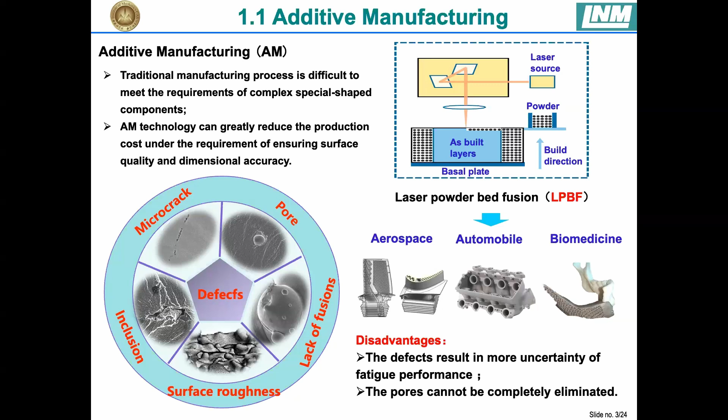But at the same time, defects will result in more uncertainty in fatigue performance. Through optimization of the process, manufacturing, and post-treatments, defects like micro cracks, inclusions, surface roughness, and lack of fusion can be well eliminated, but pores cannot be entirely eliminated due to the rapid cooling speed, which causes gas to be unable to escape from the as-built component in time. Therefore, it is critical to further study the influence of pores on fatigue performance.

For fatigue performance, fatigue life is one of the most strict indices to evaluate. But traditional fatigue life prediction models, like stress-strain, fracture mechanics, energy, and damage accumulation-based methods, all need a large number of experiments to fit material parameters to get accurate results. Also, they are usually only suitable for predicting low cycle and high cycle fatigue life.

In very high cycle fatigue, corresponding to failure cycles exceeding 10 million, we expect a larger error due to the different dominant factors in crack initiation and crack growth stages. Therefore, in this study, a pore-based prediction model of crack initiation life in very high cycle fatigue is proposed.

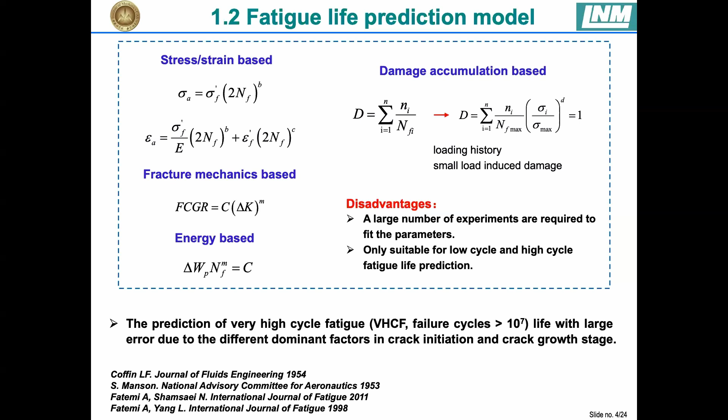The second part is about the crack initiation life prediction model and the corresponding results. The investigated material in this study is AlSi10Mg, and the corresponding chemical composition and manufacturing parameters are listed here. First, micro CT technology is applied to conduct defect characterization.

The porosity is measured at 0.33 percent, and the distribution of pore equivalent diameter and sphericity follow the log-normal and Gaussian normal distributions respectively.

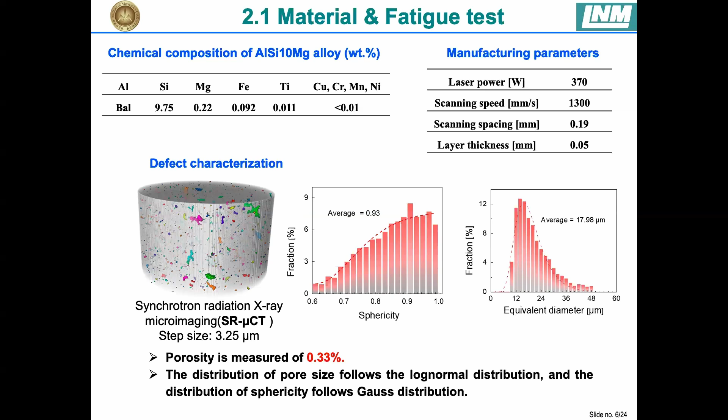EBSD is then applied to conduct microstructure characterization. The microstructure shows a weak texture, and the distribution of grain size follows a log-normal distribution, with most grains less than 2.44 micrometers.

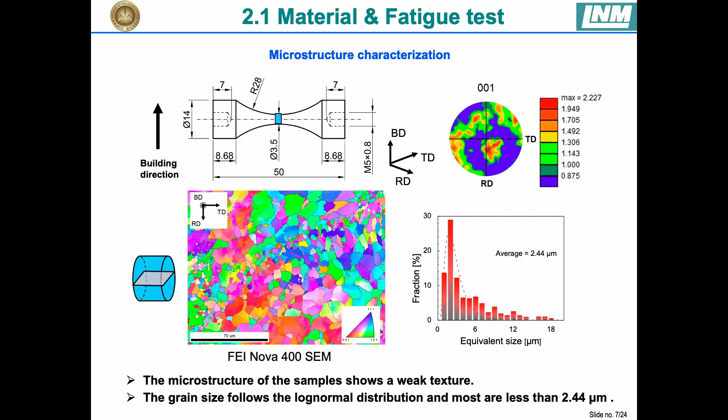Specimens are then tested with the ultrasonic fatigue test at a frequency of 20,000 Hertz. The results of the stress-life curves at different stress ratios are plotted here.

It can be found that the position of failure transferred from the surface to the interior near the fatigue endurance limit, corresponding to a failure cycle of 10 million cycles.

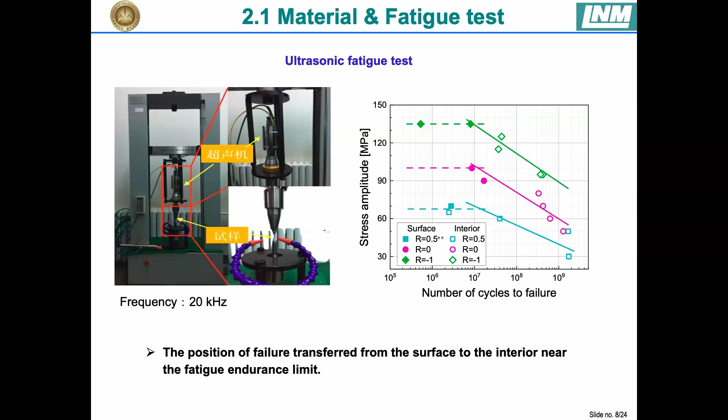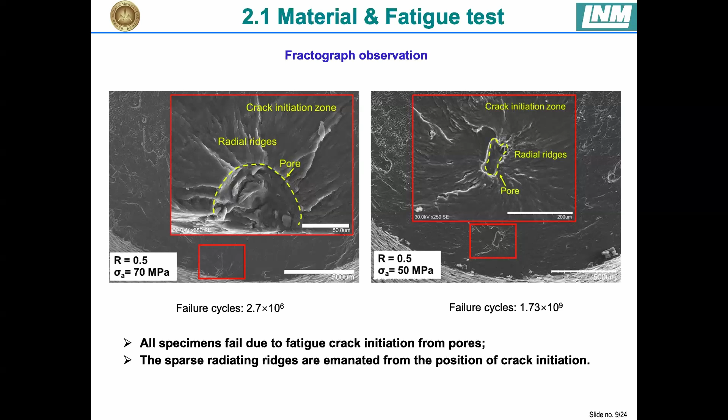Fractography observations show that all specimens fail due to fatigue crack initiation from pores, and it can also be found that sparse radiating ridges exist near the crack initiation position.

Therefore, in very high cycle fatigue, the majority of fatigue life is consumed in the crack initiation life, and within crack initiation life, it is mainly consumed in the initial crack initiation and early crack growth stages.

The following is the flowchart of the crack initiation life prediction model in this study. Step one is generation of pores and grains in a cell according to the previous microstructure and defect characterization.

Step two is calculating the initial crack initiation life of all pores, and then the minimum initial crack initiation life serves as the critical defect, with the corresponding grain size serving as the input to step three to predict the early crack growth life and the crack initiation life.

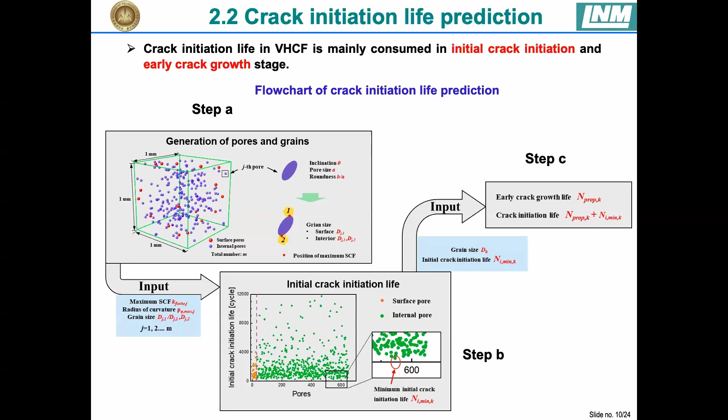For the initial crack initiation life model, we adopt Chan's model, modifying the Tanaka and Mura dislocation model by introducing the Taylor factor to transfer the micro model to the macro model.

Due to stress concentration near the pore, the local stress is higher than the applied stress. Therefore, in this study, the average local stress is adopted. In many studies, the pore is always equivalent to a circle, without considering its morphology and position. In this study, these two cases are taken into account.

Therefore, the stress concentration factors and the corresponding radius of curvature need to be modified.

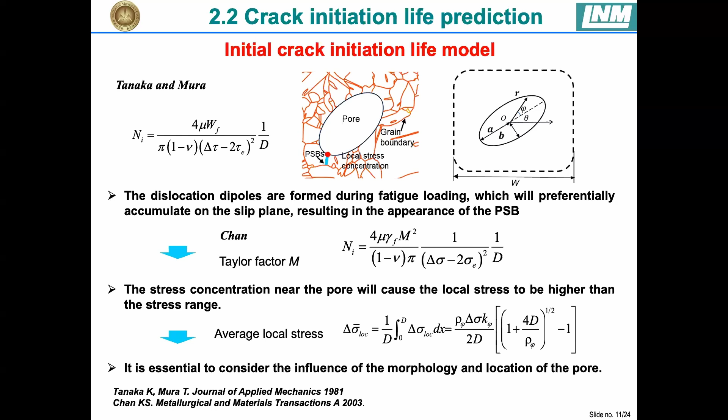For the maximum stress concentration, the finite element method is applied in this model. The inclination means the angle between the major axes of the pore and the loading direction. It can be seen from the simulated results that the maximum stress concentration shows an increase with the inclination, and only the position of the maximum stress concentration factor of a pore needs to be taken into account.

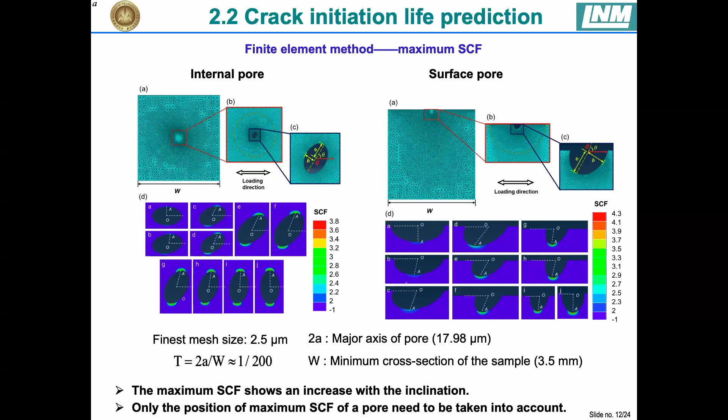The relationship between pore inclination, position, roundness, and the maximum stress concentration can be obtained by fitting the results. The obtained equations are listed here for eta equal to 1 and 1.25, corresponding to the internal and surface pores respectively, and with key initial values of 2.81 and 3.03 corresponding to the internal and surface circular pores.

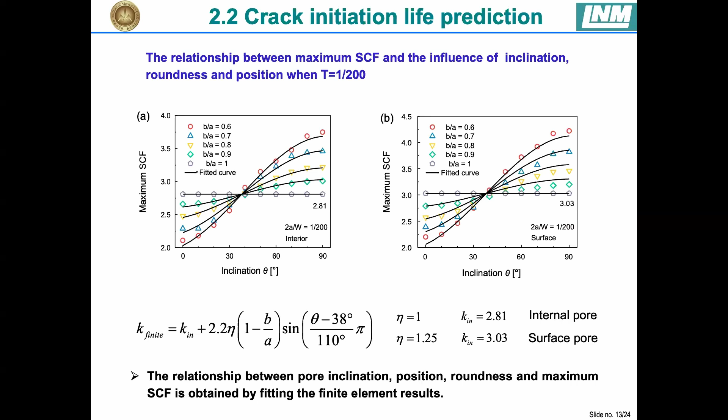For the position of the maximum stress concentration factor, Patel proposed a model of the circumferential stress along the pore edge in polar coordinates. But in this model, the inclination is not considered.

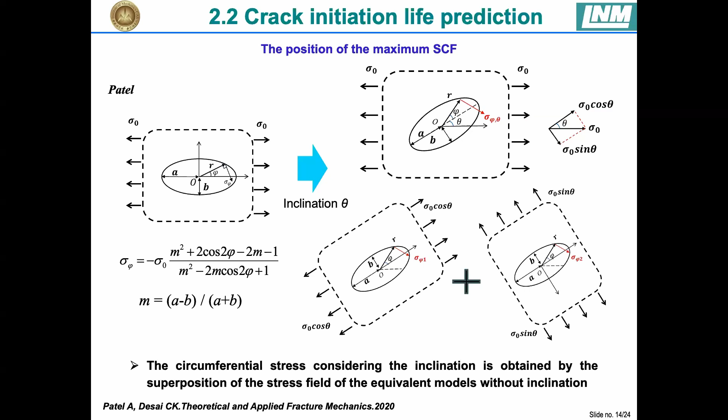When the inclination is taken into account, the applied stress can be decomposed along the inclination into two equivalent models, and the circumferential stress considering the inclination can be obtained by the superposition of the stress fields of the equivalent models without inclination.

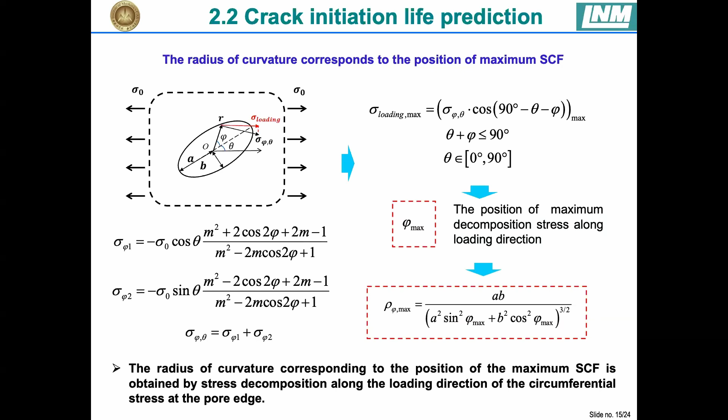Then the radius of curvature corresponding to the position of the maximum stress concentration factor can be obtained by stress decomposition along the loading direction. The position of the maximum decomposed stress along the loading direction is given by Phi-max, and the corresponding radius of curvature can then be obtained. Therefore, the average local stress can be modified by considering the pore roundness, inclination, and location.

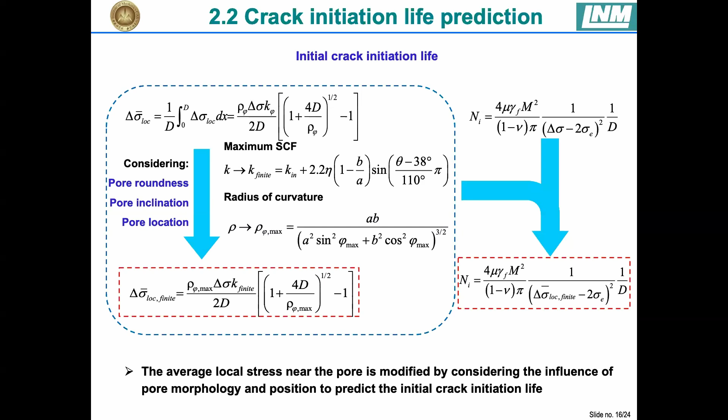This is then substituted into the Chan model to predict the crack initiation life. For the early crack growth life model, we adopt Shyam's dislocation-based small fatigue crack growth model.

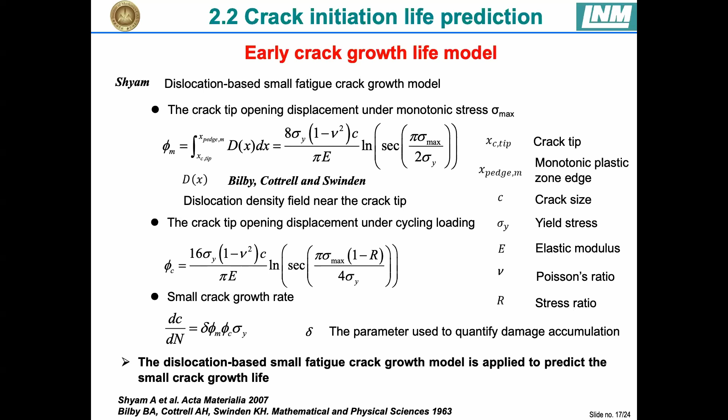The crack tip opening displacement can be obtained by integration of the dislocation density field function proposed by the BCS model. Then, by integrating from the initial crack size to the rough area size, we can get the early crack growth life. The total initial life can then be obtained by adding the life consumed in the formation of the initial crack and the early crack growth in the rough area.

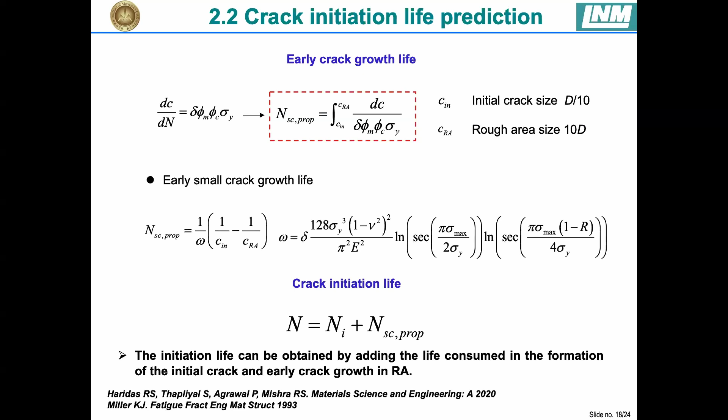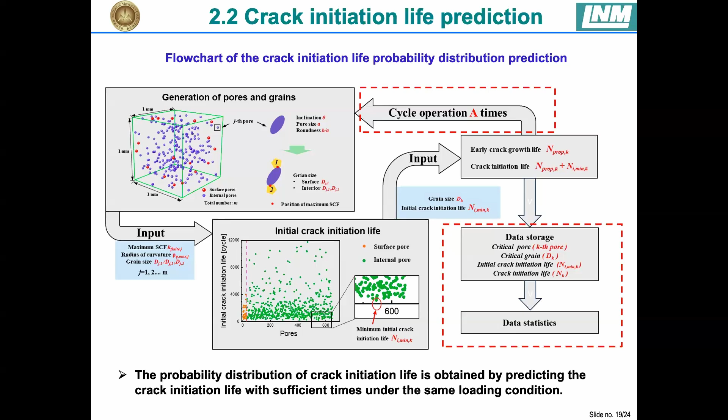In order to obtain the crack initiation life probability distribution, the above steps are cycled sufficient times. After each cycle, the data storage and statistics are conducted. After about 800 cycles, the fatigue life probability distribution can be obtained.

It can be observed that the fatigue life probability distributions all follow log-normal distributions at different stress ratios and loading conditions, and it also becomes more scattered as the load decreases in the very high cycle regimes.

The comparison of 95% confidence intervals for the fatigue life probability distributions with the experimental results shows that the predicted 95% confidence intervals for the stress ratios of 0 and -1 are conservative when the failure cycles exceed 100 million cycles.

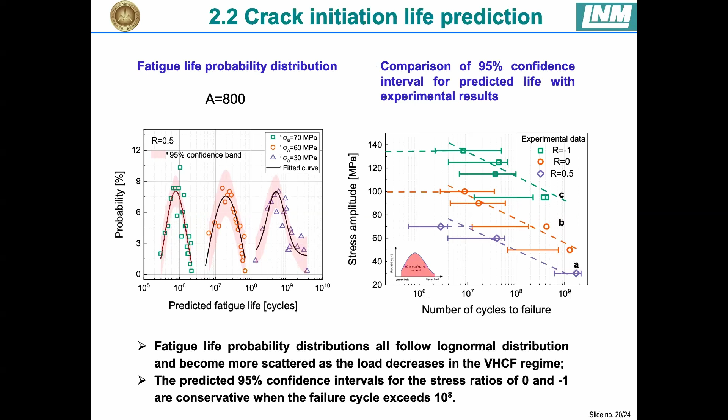Regarding the conservative results of point B and point C, the corresponding fracture surfaces are observed. It can be found that no obvious radiating ridges can be observed, and a region with granular morphology called the rough area is observed, which means the occurrence of the rough area can consume more fatigue life.

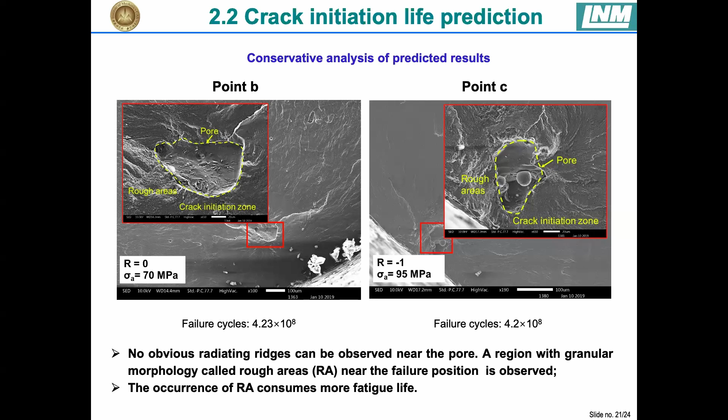This concerns the shift of crack initiation from the initial position. The competition factor, called CF, is proposed as a quantitative assessment of the tendency of crack initiation from the surface or the interior, by considering the influence of the average local stress and the grain size.

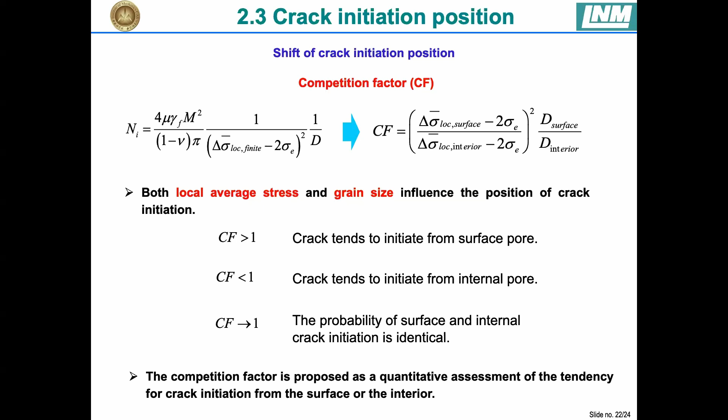When the CF is higher than 1, the crack tends to initiate from a surface pore, and when the CF is lower than 1, the crack tends to initiate from an internal pore. When CF approaches 1, the probability of surface and internal crack initiation is identical.

Also, after 800 cycles, the CF probability distribution can be obtained. The probability distribution of CF at different loading conditions all follows log-normal distributions, and the variation of average CF with the decrease of loading is plotted.

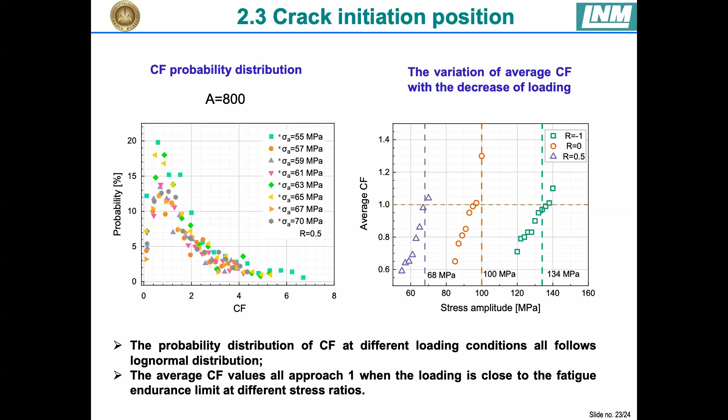It can be obtained that the average CF values all approach 1 when the loading is close to the fatigue endurance limit at different stress ratios, which corresponds to the phenomenon of the crack initiation position shifting from the surface to the interior.